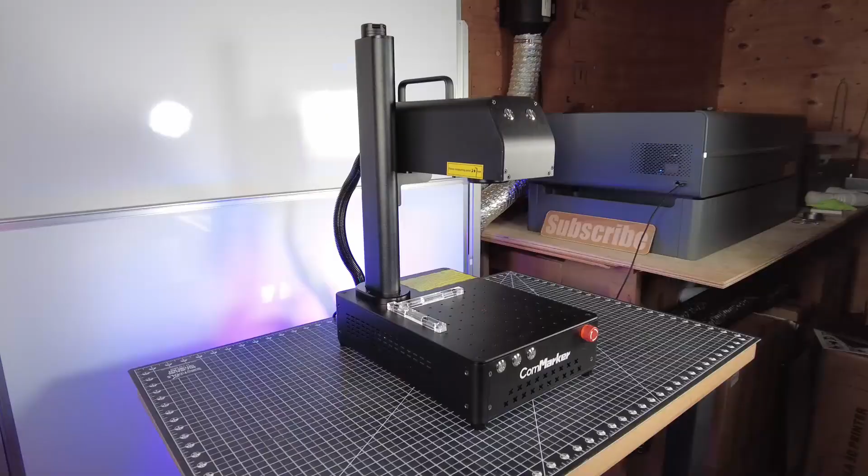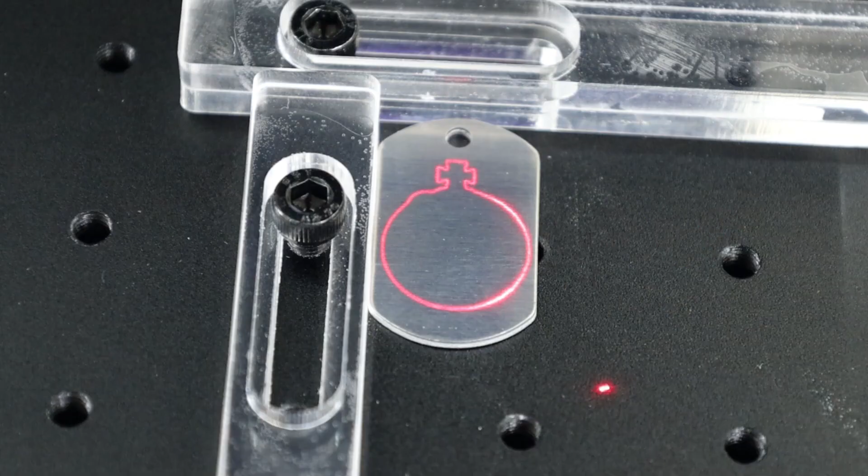If you're not familiar with what a fiber laser is, it's basically a type of laser that can actually engrave onto metals. But it's not limited to just metals, as you can see. It's able to do this extremely fast, with some really nice details. What you're seeing right here is real-time engraving, so I'm not speeding this up whatsoever, which isn't bad for only 8 seconds. On top of that, you can do some pretty interesting engraving techniques with this, like this 2.5D or 3D engraving. It's actually pretty easy to do as well, but I'll show you that later in the video. But first we need to actually assemble the laser and get it all set up.

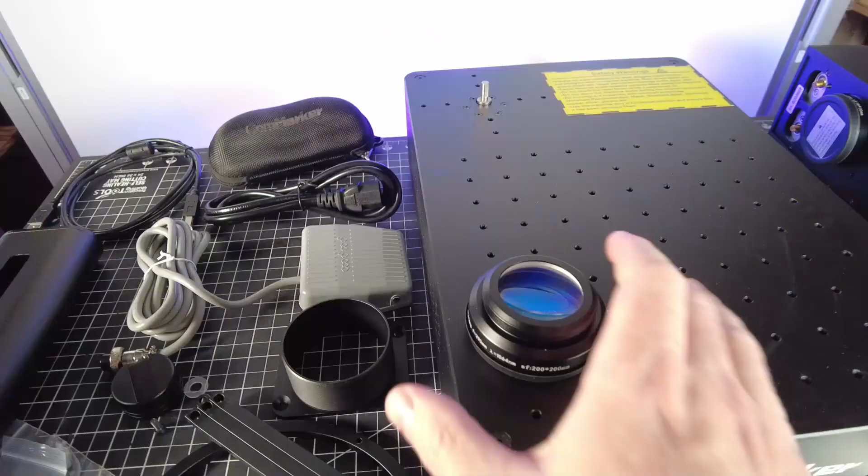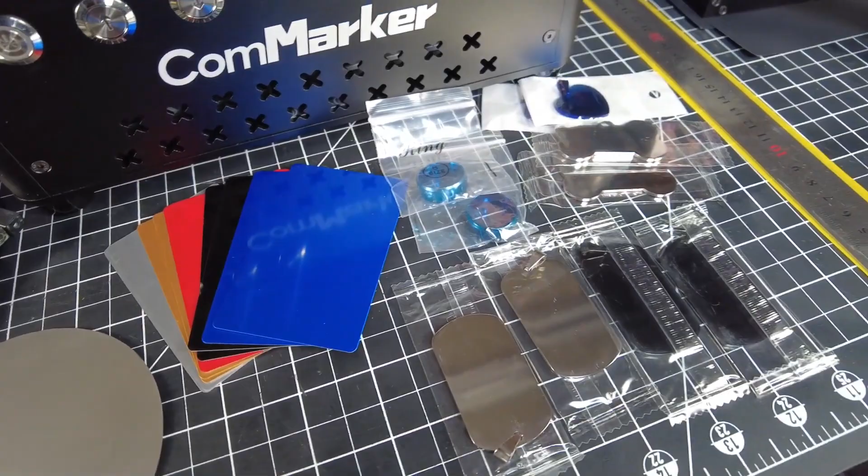This is everything out of the box. It even comes with a secondary lens, and your lens will dictate how big of a work area you have, along with accuracy, so it's definitely nice to have both options. They also included a handful of test materials, so at least you'll have something to use and test out, so you can get a hang of using the laser itself. All the parts of this laser are actually made out of metal, and everything feels nice and sturdy.

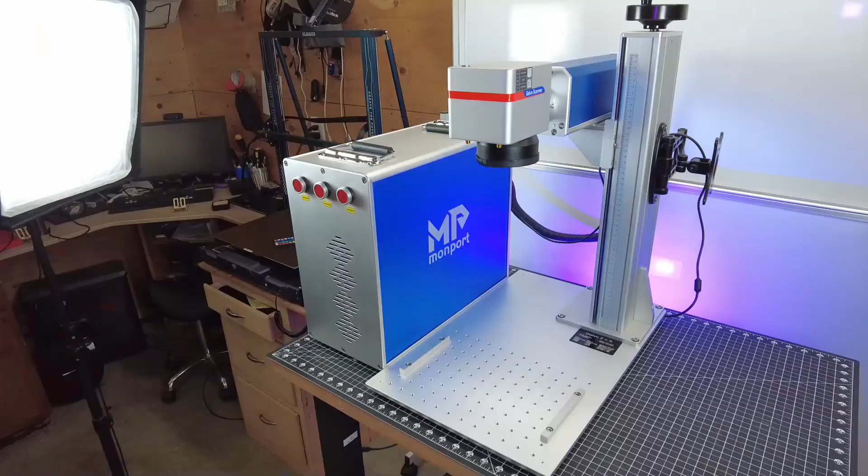Let's get this whole thing put together. It does have a pretty good instruction manual, which was easy enough to follow. Here it is all set up. Honestly, it has a pretty small footprint, especially if you compare this to my 50-watt laser, which definitely takes up a bit more room. I even put it on its own cart so I can move it around.

This B4 laser engraver does have a 50-watt and 60-watt option with the same form factor, so if you need that extra power, you have that option.

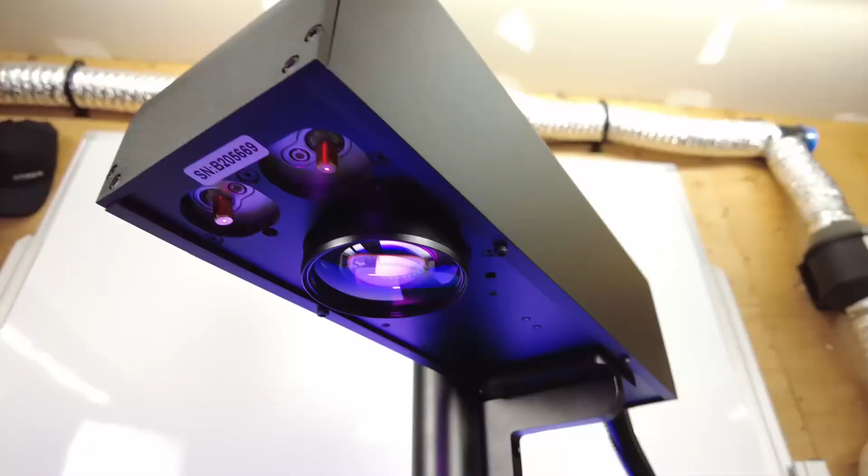If we look at the front of the machine, you can see that it has some very simple controls, like this emergency stop button, which will cut all power to the machine right away, and it has its main power button on the front as well. These other two buttons are focus controls, and these will allow you to raise and lower your laser head. Even with this being powered, you can see that it moves pretty slow, but this does help with dialing in your focus to make it perfect.

There's even a hand crank at the top if you need to move this without power. It does have some laser guides that will help you focus this to the material you're going to be engraving on, and you just want to make all of these converge to one point. You can see the two laser pointers on the underside of the laser head.

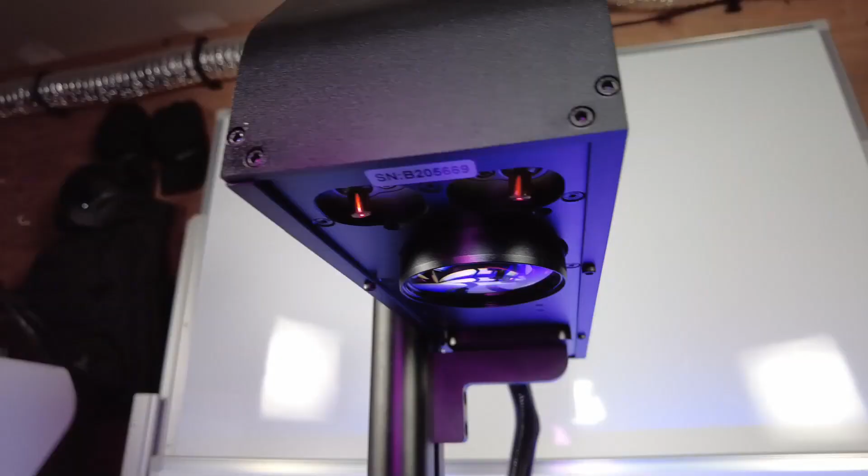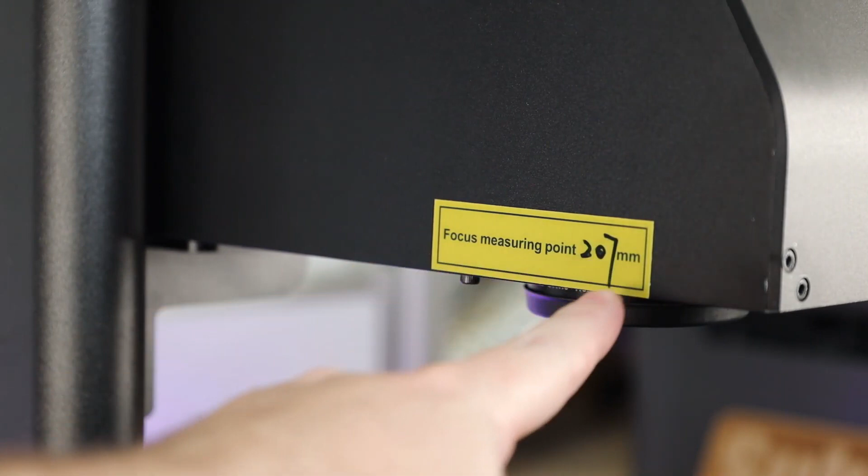Out of the box, these are set up for the 110mm lens, and can be readjusted if needed. They do have the focus point on the side of the machine as well, in millimeters, so you can set that up easily. Surprisingly, they actually took the time to write this in the book as well, along with the focus point for the other lens. They also go over in detail how to do this yourself if you need to.

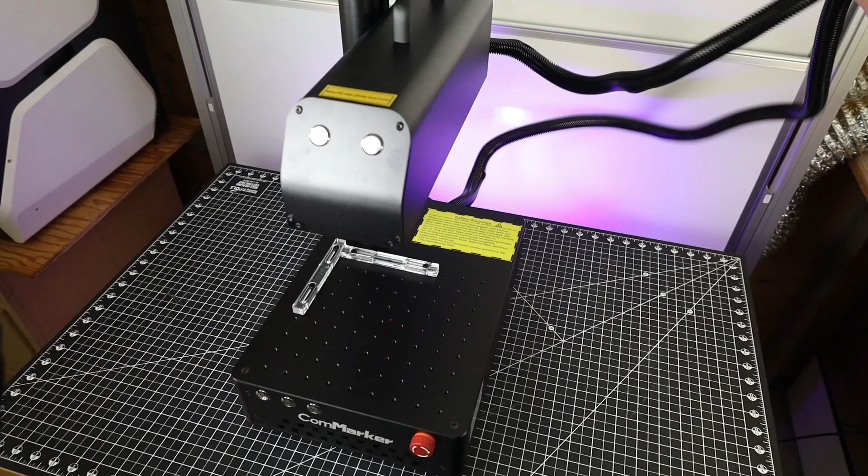There's also two buttons on the front of the laser head, and these are to activate the red lights, or to start your laser engrave without having to use the computer. You might have noticed that there's a handle on top of this, and that's because this entire laser head can come off and be used handheld. That's why the cable on the back of this is extra long. It also comes with this little cage that kind of just bolts on around the lens, so you can make sure you're always in focus. I honestly don't see myself using this feature very often, but it's good to have.

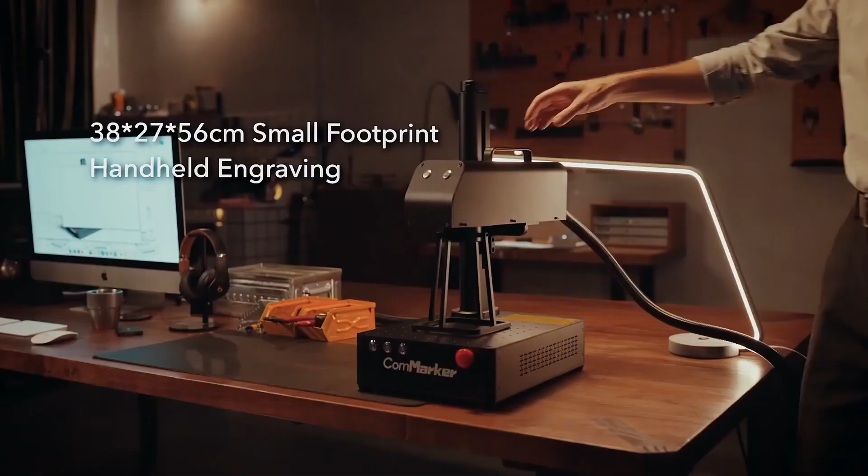To actually operate this laser, you do need to use a computer, with either some free software called EZCAD, or a paid software called LightBurn, which is a one-time fee of $150. I use LightBurn with all of my lasers, so I'll be using it in this video as well.

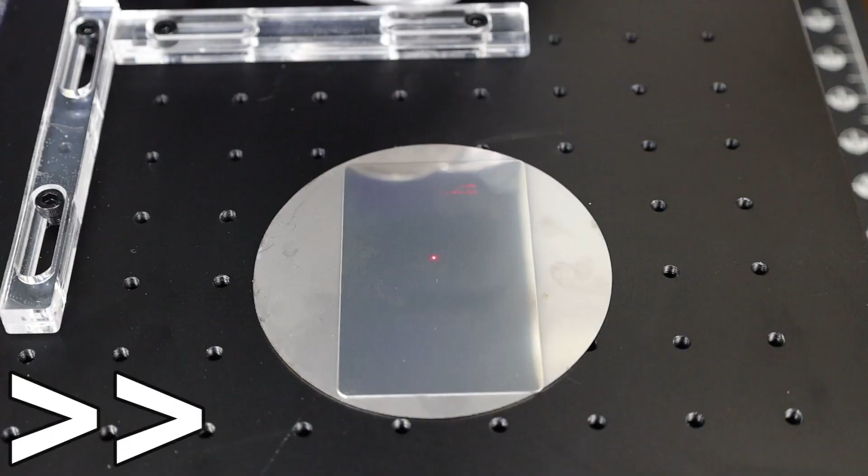This did come with these little metal sheets to do testing on, but I'm going to use one as a backing for now, so I can do a material test engrave, and this will help protect my work area in case things get too hot or go through the metal. I really suggest doing this to every material you're going to be engraving on. It pretty much takes all the guesswork out of the process.

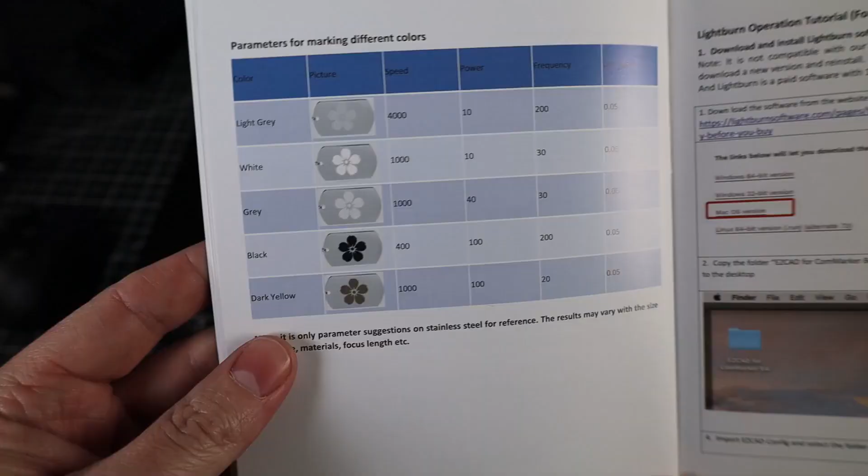This is just a simple stainless steel card. If you look in the manual, they actually have some settings that will change the color you can engrave on stainless steel, mostly by changing the frequency. It would be helpful to have more examples for other materials as well.

This is the same material test on an aluminum business card, and you can see it actually made a hole through it at one point. So that's definitely another good reason why you want to do this.

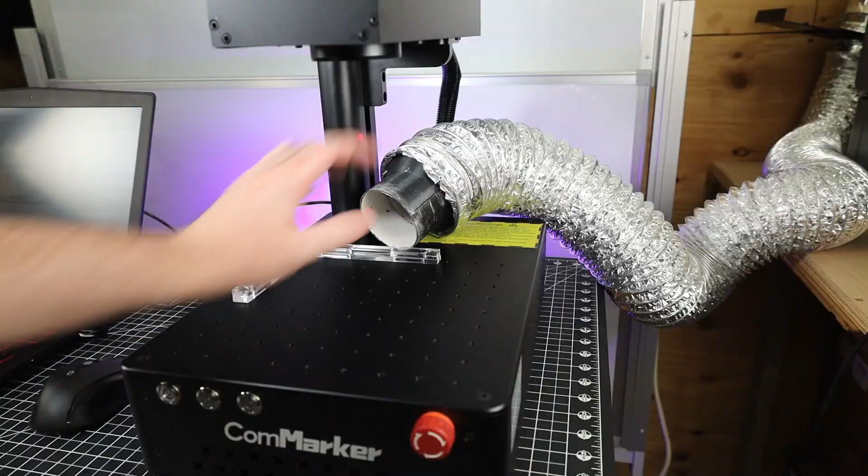When you're using this laser, make sure that you have some sort of ventilation set up, because you're burning metals and you don't want to be breathing that in. I'm just using some ducting and inline fans, pushing the exhaust outside.

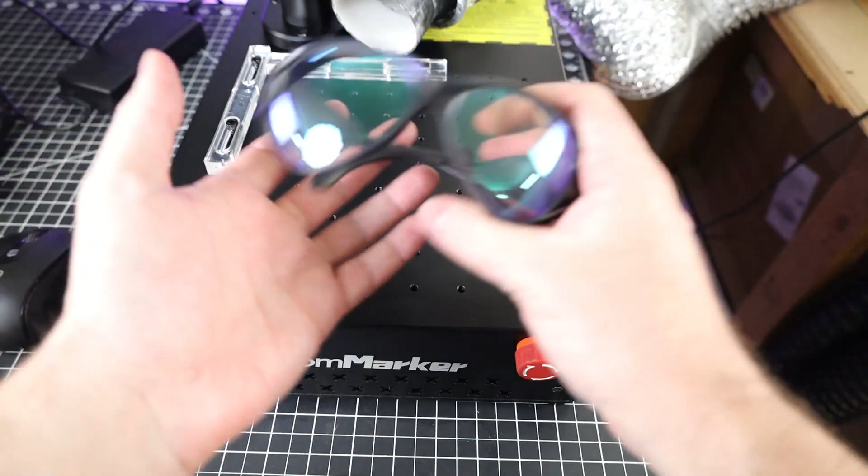Since we're on the topic of safety, make sure you're using eye protection with this as well. Seeing that this laser came with some, I'll be using that.

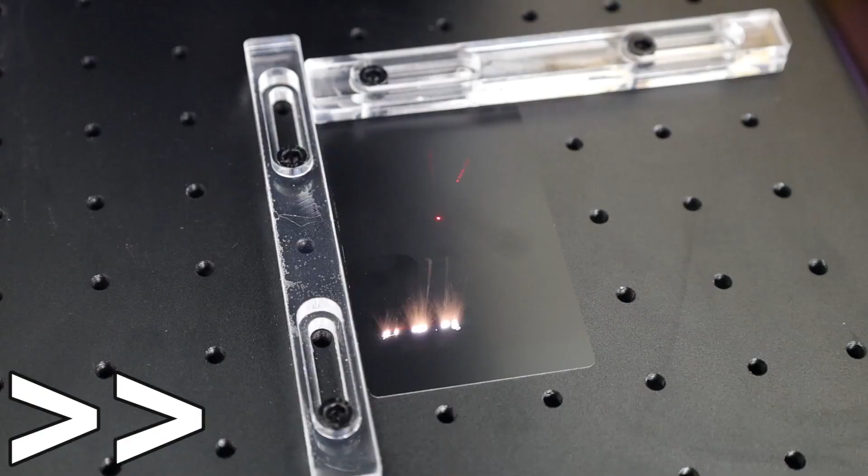You might have noticed that there's a lot of threaded holes on the build surface. This is so you can mount your guides to it and set up your parts in the same spot every time, so if you're doing a bulk order, everything should come out exactly the same.

If you are making things in bulk, it does come with a foot pedal that you can use to start up the laser and keep both of your hands free. Of course, for the video's sake, I'm using my hand to start this, just so you can see it in action.

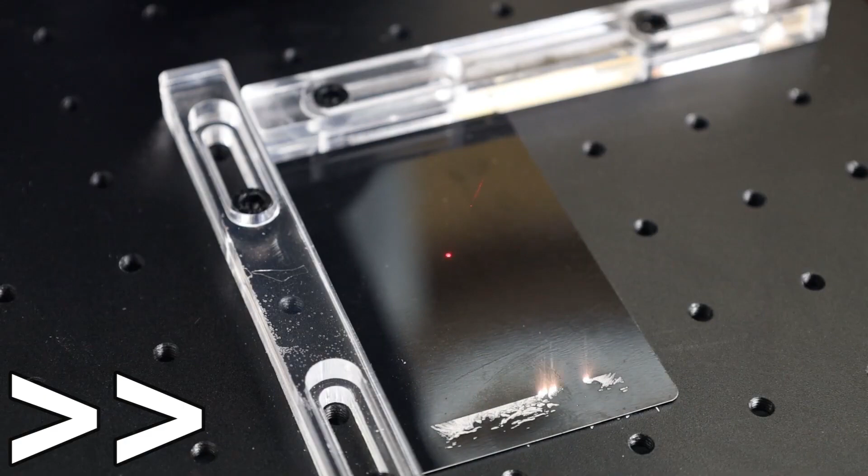With these kind of lasers, you can do vector line work, or you can do full-on pictures that will come out in grayscale. There's definitely a lot of trial and error when it comes to these, but once you figure out your settings for the material you're working with, you can get some really nice results.

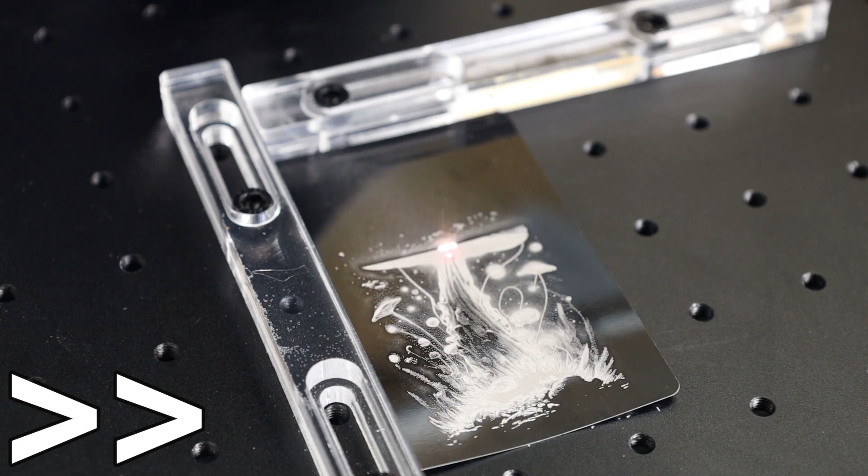Even with this engraving, I don't have it tuned in perfectly, and you can see the card kind of warping, but the end result still looks pretty good. I just need to turn down the power a little bit.

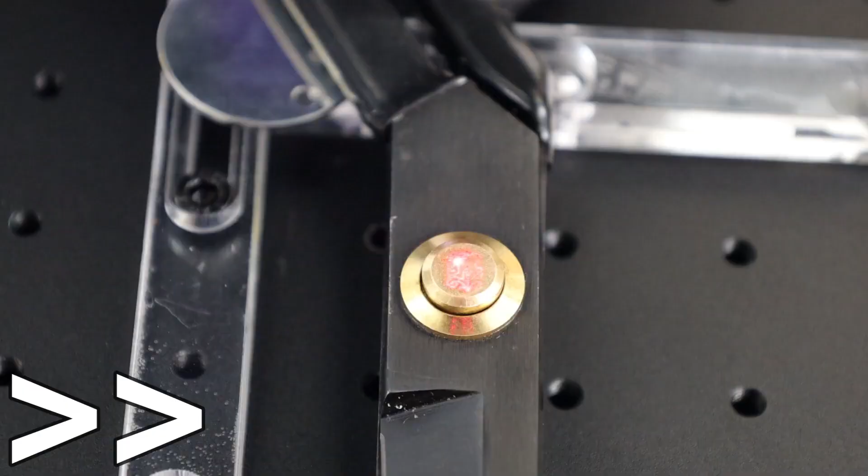You can also use this to add or remove markings from tools, or really any material that this laser works with. But getting rid of markings isn't the cleanest process, as you can see, but adding them to a clean area is a really good way to add a professional touch to things, as you can see on this brass part.

You can also use this on 3D printed parts, so you can add some finishing details and make things look a bit more finished. I really do think it gives you a leg up on other people 3D printing parts and making products out of them, and it only takes a few seconds to do.

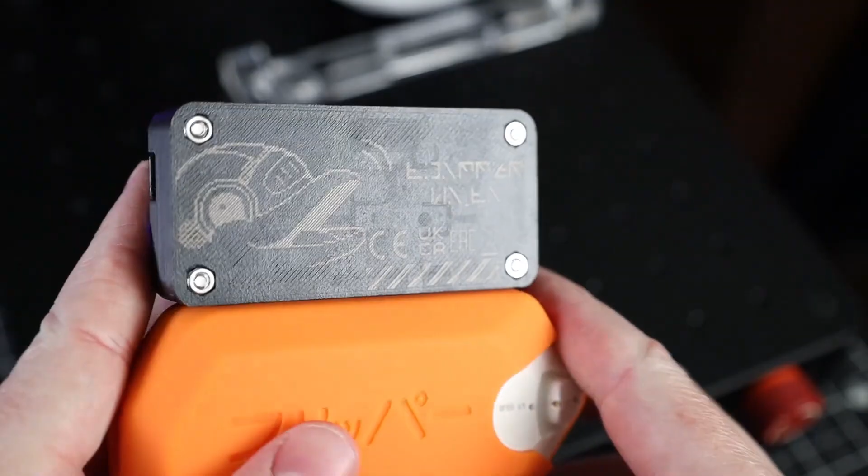If you're wanting to do round objects like bracelets or rings, you can easily do this using one of the rotary tools. This smaller one here is pretty much made for jewelry making, and it has spring-loaded jaws, so it makes it really easy to put your pieces into it.

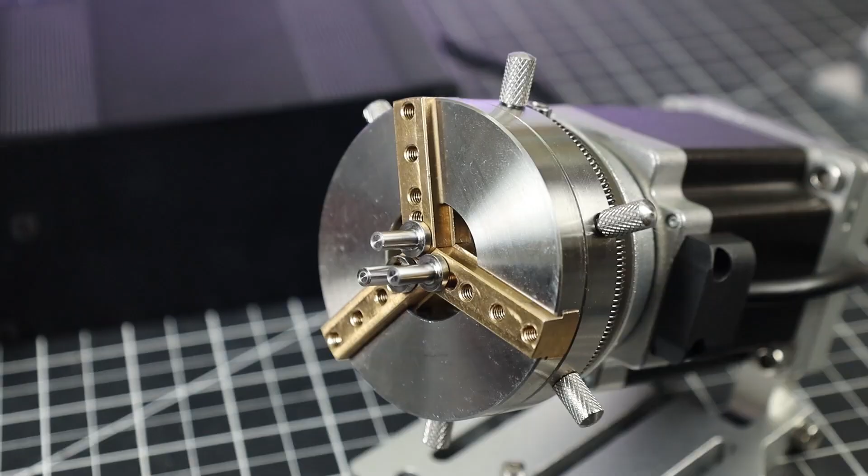As soon as you let go, it'll put pressure on your piece and hold it exactly where you want it. The gripping posts on this can be moved around, so they fit with whatever you're working with. It does come with a few different styles of these.

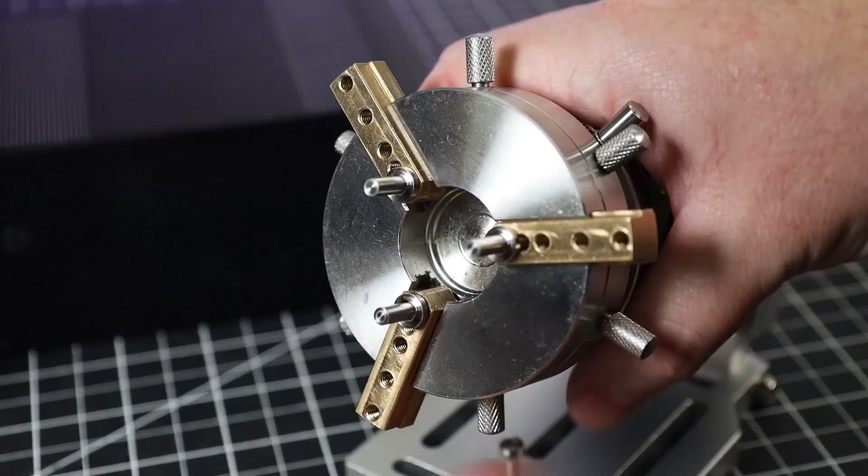If you do take one of these, you can screw it in the back here where the spring is attached, and it makes it really easy to pull this out and reverse your clamping action. To do this, you just have to reattach the spring going the other way, so instead of pushing in, it will pull out. That way it will hold the ring from the inside, and you'll be able to engrave on the outside of it.

And of course, with the other gripping method, it holds it from the outside, and you can engrave on the inside. And when it comes to the other rotary tool, this is a much bigger setup that can hold a lot more weight, and just larger objects in general.

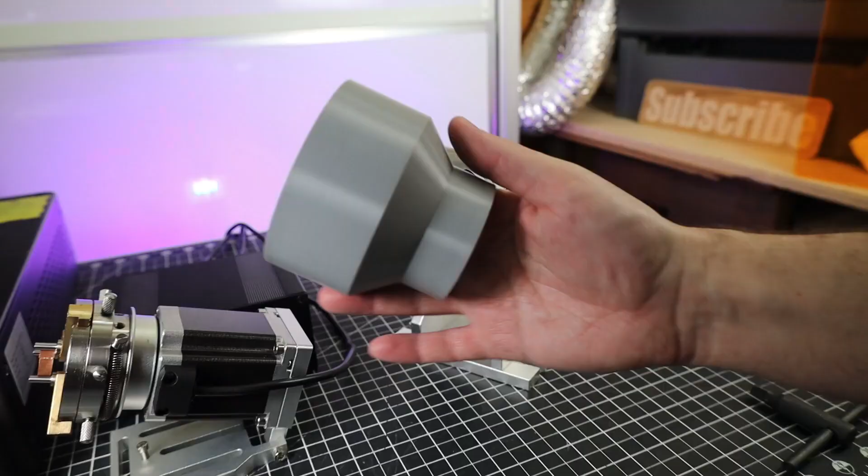So just as a quick example, I'm going to use this 3D printed adapter, and to attach this to the rotary setup, you do have to use a tool on this one. But once you get it attached, it's not going to go anywhere. And this kind of ties in with the heavy-duty nature of all this.

And that also means you can easily engrave on tumblers like this one. But it's not only limited to bigger things like this. I was able to attach this to the machine itself, and use an expandable mandrel with it. That way I can hold a ring in place.

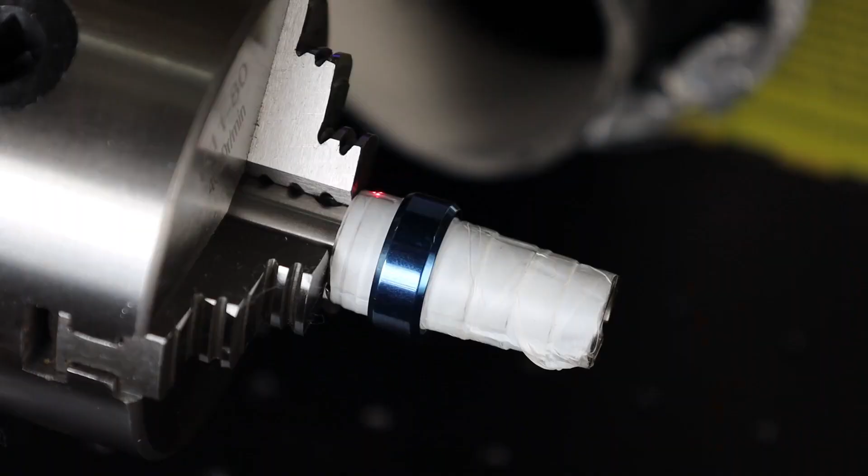And with my first go of it, it did work, but it didn't come out great, and there are some mistakes on here. And if you look in the software, there's a lot of settings that you can go through and change. So I did mess with some, and it came out a little bit better, but still not perfect. So like most things, it's just going to be some trial and error.

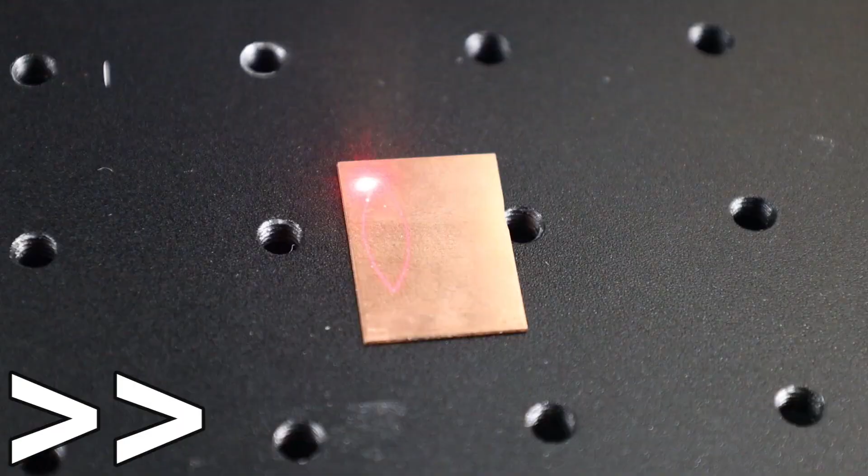And if you're doing jewelry making or metalworking, you can use this to mark designs into your metals that you'll be cutting out later, which definitely comes in handy. And this pretty much works exactly the same as the templates I designed, so anyone can mark out complex shapes without any trouble. But honestly, the laser can do a lot more than my templates can by marking the part and adding a bunch of details, all at the same time, and this laser can engrave pretty deep, so you really don't have to worry about this wearing away over time.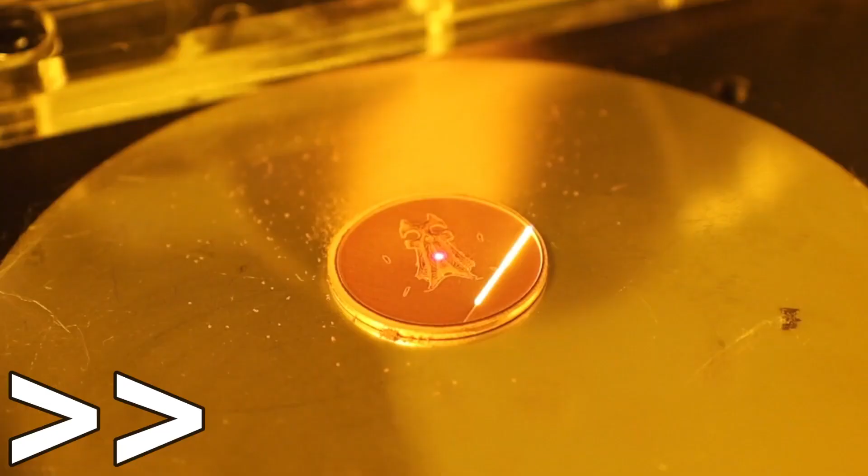And since we're on the topic of deep engraving, let's take a look at the 3D engraving this can do, which I actually find to be really interesting and opens up a lot of possibilities. And it's surprisingly easy to do.

You will need a 3D file of whatever design you're going to be making, and just for an example, I went to Printables and got this design. And these files are meant for 3D printing, so we're going to have to convert this into an image that the laser can actually use.

And luckily someone made a free converter to do just that. And all you really need to do is make sure you have the right orientation, and for this it's going to be top down, and you can pretty much leave everything else alone, and then just select the file you want to use, and everything will start up automatically.

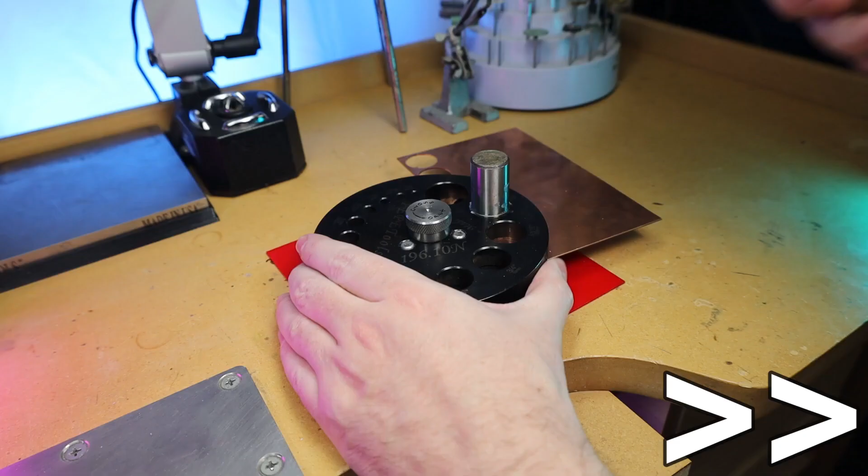And you're going to end up with a grayscale image like this one, and the laser will be able to use this as a depth map, with the lighter areas being the higher spots and the darker areas being the lowest. And for this piece I'm going to use a disc cutter and cut out a piece of copper, and I modified the background of the image so it's a circle now.

And to make everything work, there are some important settings that have to be changed, or this will just engrave as normal. And these are all the settings that I'm using for this. And if you're using this as some sort of tutorial, take a screenshot of this. But the image mode is the most important part and needs to be 3D sliced.

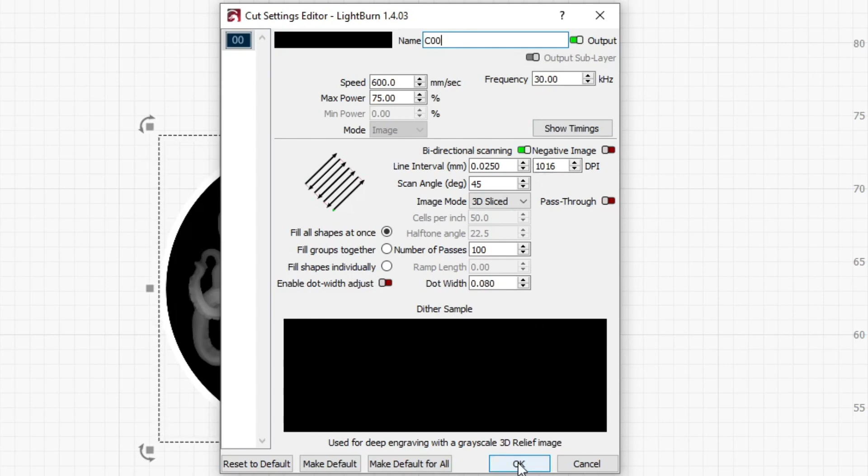And the power and speed settings will be different for every material you use, so you're going to have to test things out to find what's going to work for you. But with this, at least you have a starting point.

But now I can click frame and adjust my material to make sure it's going to line up. And this laser did come with an acrylic shield that I'm going to be putting up. That's why everything is going to be orange.

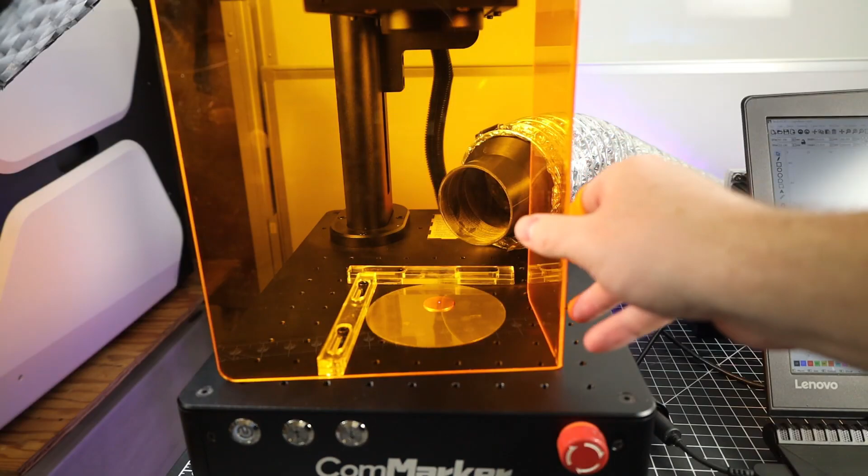But it's definitely a welcome addition, so you don't always have to have glasses on around it, especially when you're doing these very long engravings. And these 3D engravings do take a while, even with this being as fast as it is.

This one took over 30 minutes to do, but it's also going over it 100 times, which you can adjust in the settings to be even more, so you can have even cleaner engravings.

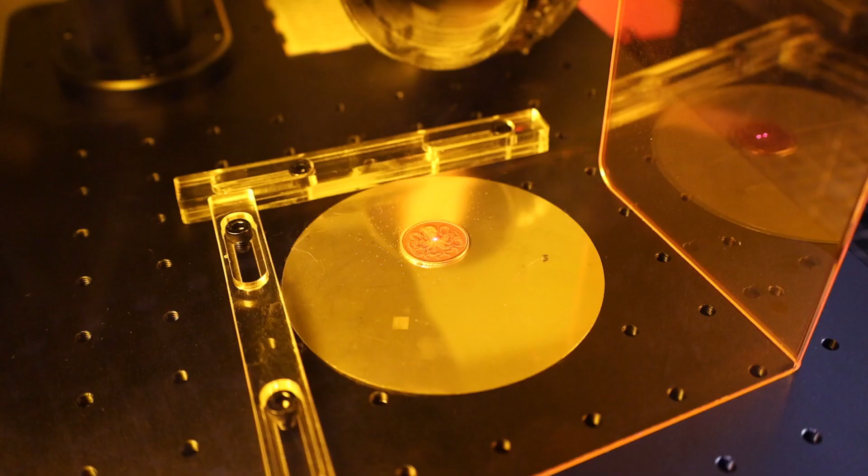When it does finish, it will be kind of warm, so be careful when grabbing it so you don't burn yourself. And definitely make sure you have ventilation for this, because it makes a ton of metal dust that you really don't want to be breathing in.

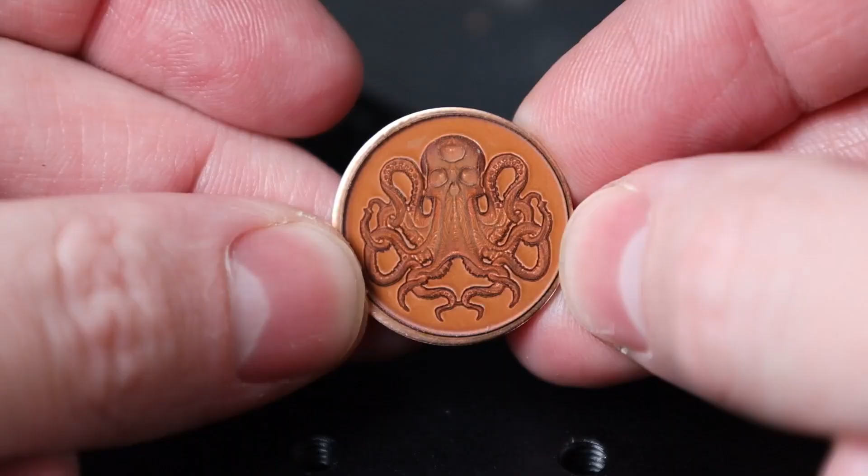But here's a finished piece, and you can see how detailed this actually came out, with how much depth was taken out of the metal.

If you're doing this with gold or silver, you're going to want to capture all that dust, so you can melt it back down and use it again. And here's the same design and settings on a piece of brass.

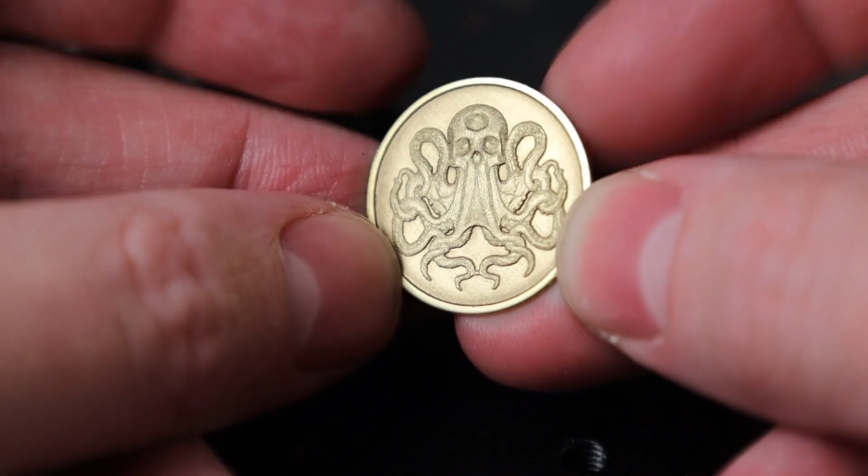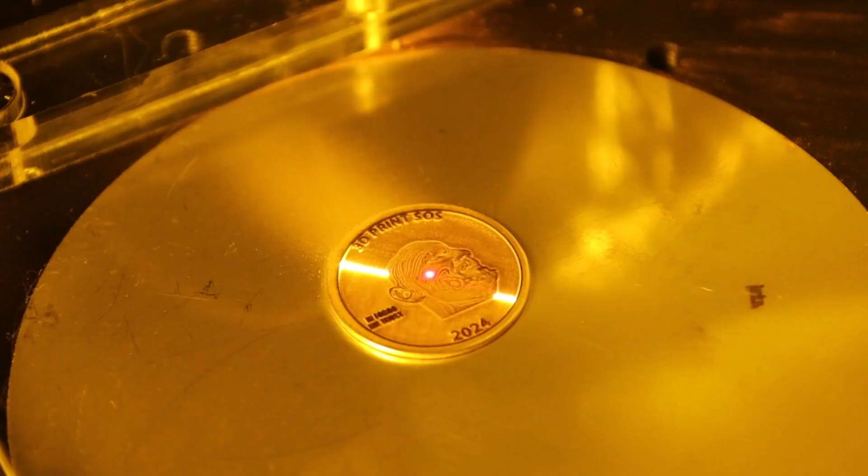Just because I thought it was a fun thing to do, I made a coin for a fellow YouTuber. He happens to have a full 3D scan of his body that he's currently printing out to make a 1:1 scale model of himself. So I had him send over just the head file and didn't tell him what I was doing with it.

I told him to watch my next video so he could see what I made, and I think it came out looking pretty good. I made sure to do it in both copper and brass to see how they compared. This is before I cleaned them up — you can see a lot of black spots and stuff on them.

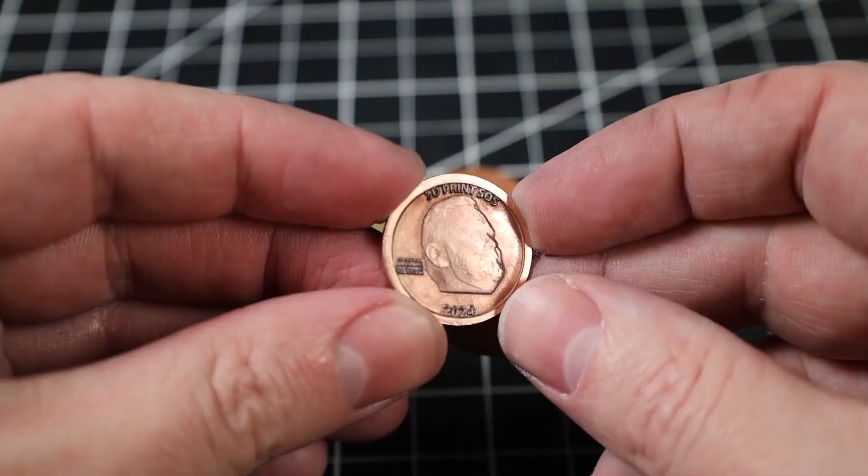I also put his logo on the back of these with a 3D engrave as well. And with a quick cleanup and polish, they actually look like real coins. So definitely something interesting you could do and make custom coins.

Even though this laser can do a lot of engraving and marking, it can also clean up your tools. So if you have some rusty pliers, you can easily remove that. That also means if you want to use this handheld, you can clean off rust from much bigger objects.

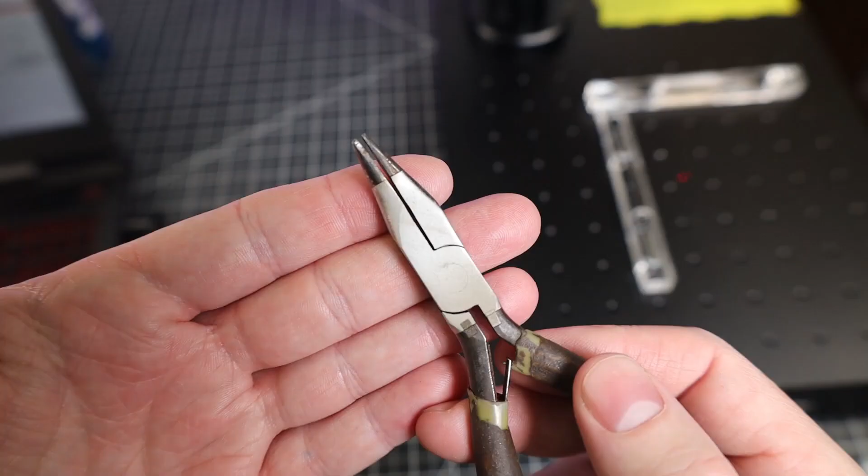If you want to protect your work area when doing this, you can just put down a normal piece of white paper, because this laser will not affect it whatsoever. You can see how well it cleaned this piece off, compared to how it was. So just another use case that I wanted to make sure you knew it could do.

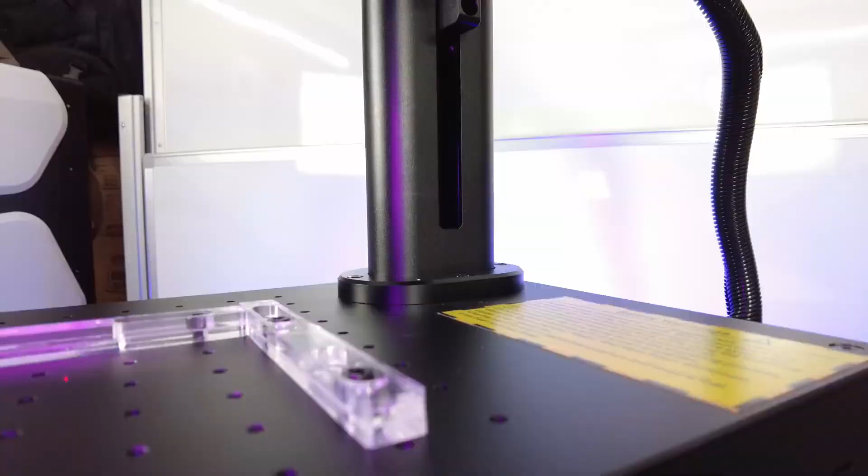But at the same time, this is not a cheap tool. It's about $2,000 for the 20 watt laser. So if you're going to be using this for business and making money with it, then this price isn't that bad.

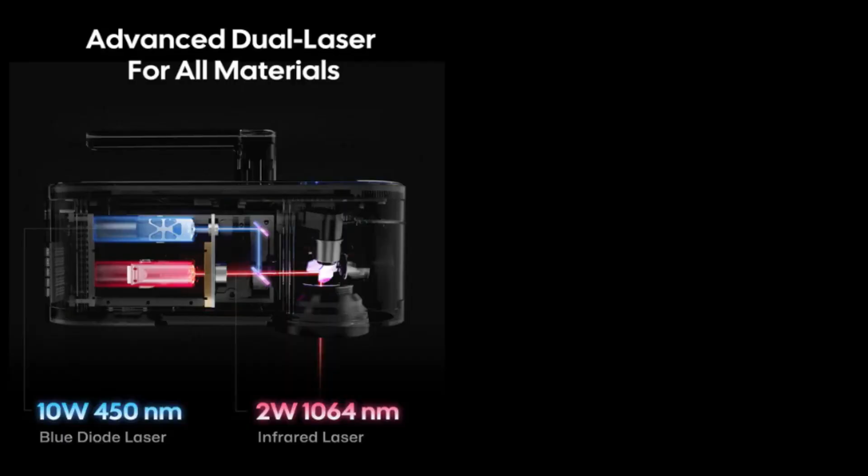Especially if you're comparing it to something like the LaserPecker 4. That seems to be usually around this price, but this is only a 2 watt laser compared to the 20 watt laser on the B4. So even with the almost $500 difference, the B4 laser is going to blow the LaserPecker out of the water every time, along with saving you hours in engraving time due to the power difference.

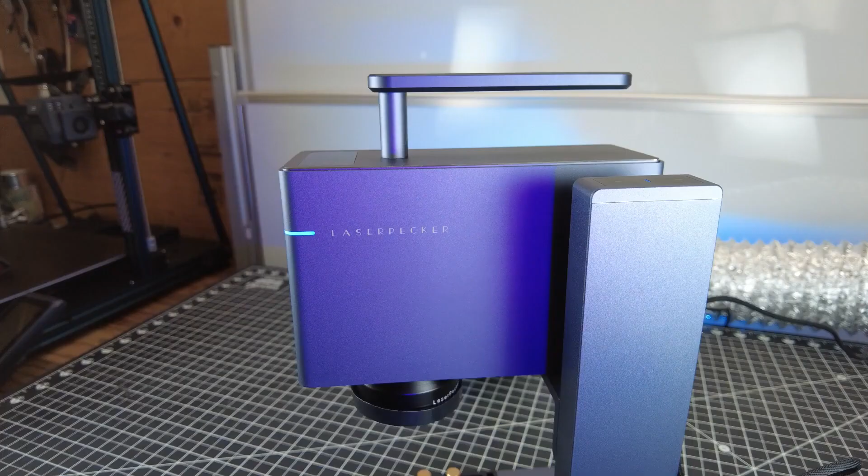But those are just my thoughts based on my past experience with all of these different lasers, and the ComMarker B4 just happens to be the best bang for the buck right now. If you needed more power out of this unit, they offer up to a 100 watt unit, but it's going to cost you around $8,000. Still, as you've seen, this 20 watt laser can get a lot done.